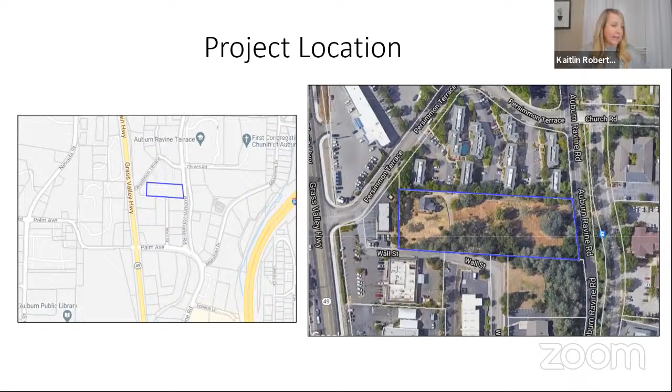On the west side, you'll see that there are three structures proposed. There's these three buildings here, and then this is the existing single family residence to the north. And this is Wall Street to the south. So building one, right here, is proposed to be approximately 1,300 square feet, a single story detached garage. And it will have 4 one-car garages and 1 two-car garage.

And then building 2, right here, is proposed to be approximately 7,000 square feet. This one will be a 3-story structure with a lower level garage and then 2 upper levels of apartment units, 2 one-bedroom apartments on each level. And then building 3, right here, is proposed to be a 2-story structure with 2 two-bedroom apartment units. And that one's 5,300 square feet.

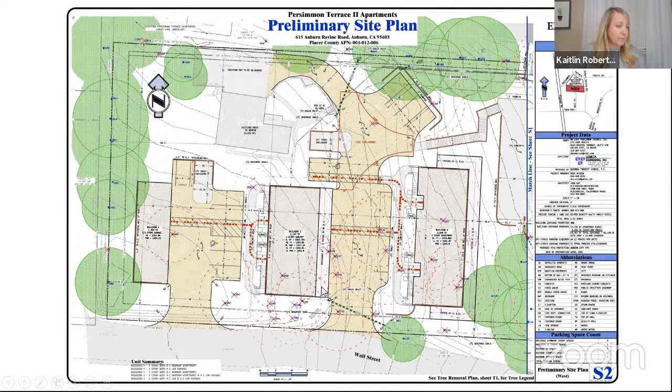In terms of parking, the city requires 2 spaces per residential unit. So for the 12 units that are a part of this project, there would be a requirement for 24 spaces. This project is proposing to provide 31 spaces. Those are included in the garage spaces and then some uncovered surface parking in the parking lots. And then there's also the handicap spaces. I think there's 3 handicap garage spaces and then 3 outdoor surface parking spaces.

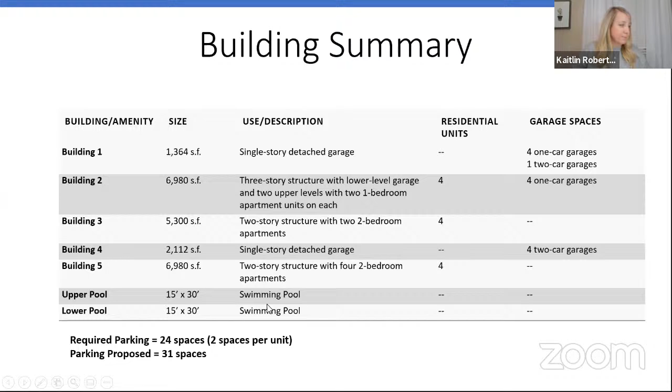There was a preliminary drainage stormwater quality plan prepared for the project, and that report notes that the drainage flows from west through the site, east towards Auburn Ravine. There's an existing inlet storm drain located in the northeast corner of the site, which you can see here, and then this slide provides a better detail. Back here. Drainage, let's see, what was I going to say about that?

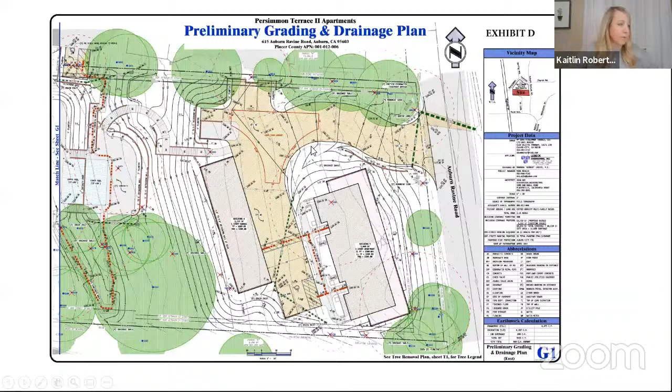This existing storm drain pipes runoff from approximately half of the site through an existing 10-inch storm drain into Auburn Ravine. And then the remaining half of the site drains down Auburn Ravine Road and flows along the westerly side of Auburn Ravine, and ultimately drains through an existing storm drain into Auburn Ravine as well. This existing 10-inch culvert under Auburn Ravine Road will need to be sized up to an 18-inch storm drain as part of the proposed project.

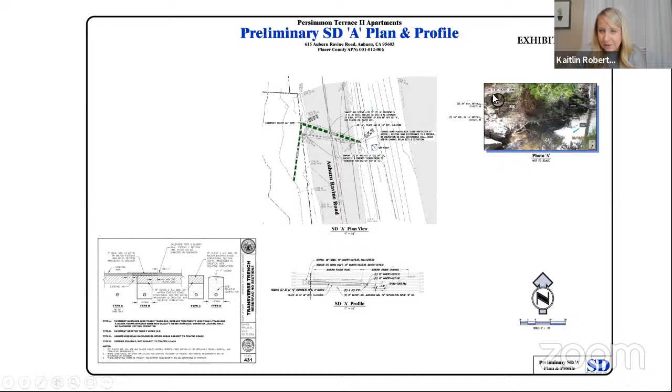In terms of utilities and services, sewer service will be provided by the city. Gravity sewer laterals will connect each of the 3 residential buildings to an existing 10-inch line that's currently serving the property. And then water will be made available by the Placer County Water Agency.

And there's a proposed looped water line on the site, which will be accomplished by extending an 8-inch water connection from the adjacent parcel to the west, and then extending that east to an existing 8-inch line in Auburn Ravine Road. Pacific Gas and Electric will provide gas and electric service to the site.

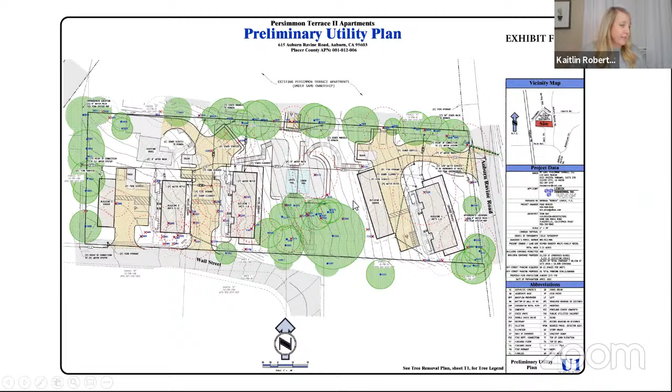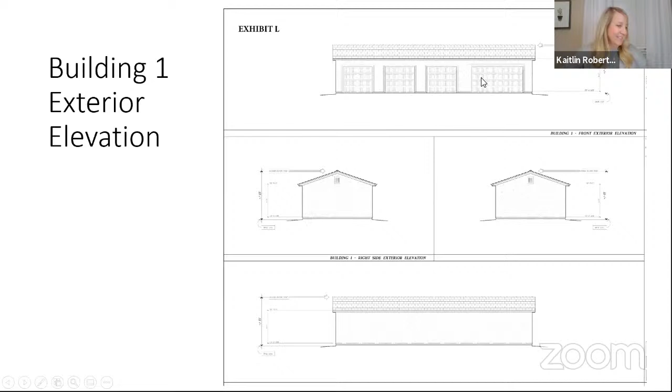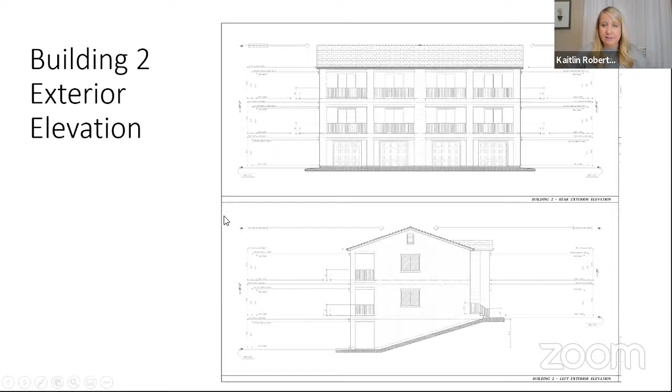And then building 2 here, this is the 3-story structure that will have the lower level garage and then 2 upper levels with 2 1-bedroom apartments on each level. And this is the rear and left elevation. And then the floor plan for the garage level, the lower level, the middle level, which will be 2 apartment units, and then the upper level, which will be an additional 2 units.

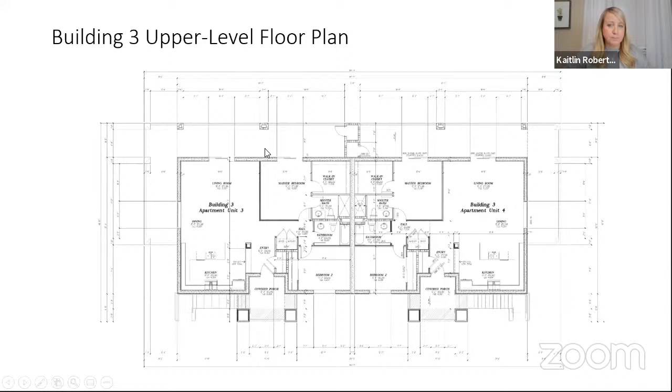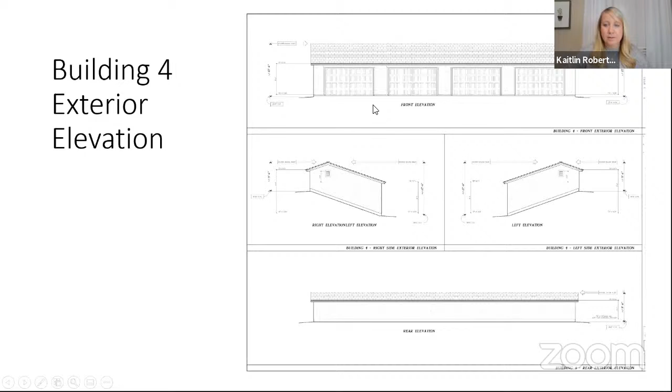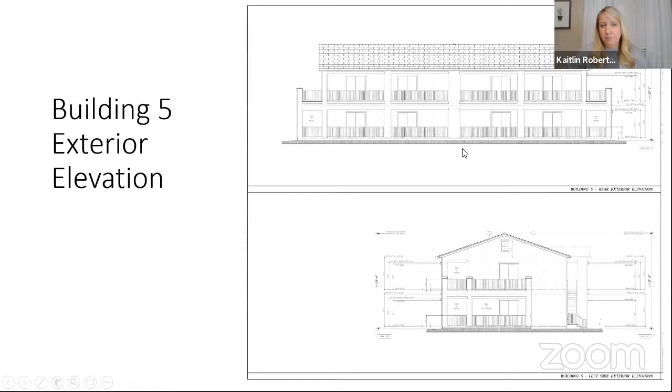And then building 3, this is a 2-story structure with 2 2-bedroom apartments. And then the lower level floor plan for that one, a little bit larger units there. And then the upper level. And here's building 4, which is the other single-story detached garage with 4 garage spaces. And then the floor plan. And then building 5 here, this is another 2-story structure with 4 2-bedroom apartments. And then the floor plan.

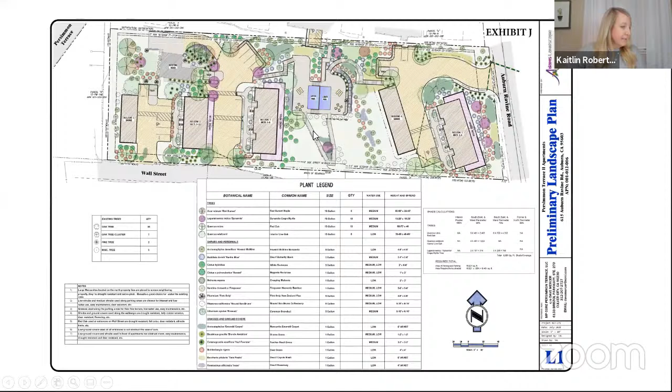Okay. And this slide has the landscape plan that was provided, the preliminary plan provided by the applicant. At the time of building permit or improvement plans, they will be required to submit detailed landscape plans that will be required to comply with city standards. And that's been included as a condition of approval as well.

As I mentioned before, this project is requesting approval of a tree permit. The applicant did provide this tree removal plan and then an arborist report with a mitigation plan. Both of those are included as exhibits in the staff report. There are 99 trees on and immediately adjacent to the site. And of those on-site trees, approximately 54 are protected trees. The project proposes to remove 35 trees for construction, and of the 35, 20 are considered protected trees.

And for the protected trees, the developer will be required to mitigate the removal of those consistent with the requirements of the Auburn Tree Ordinance. Mitigation can come in the form of on-site planting or in the payment of an in-lieu fee. And that is also all included as conditions of approval for the project.

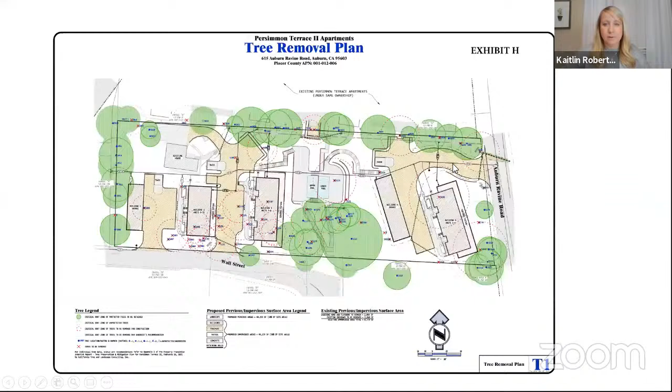Wrong way. Staff has reviewed this project for its consistency with the general plan and finds that it is consistent with the following goals and policies. Land Use Goal 1 is to guide development in a pattern that will minimize land use conflicts between adjacent land uses. Land Use Policy 1.2 is to have multifamily residential projects designed to minimize impacts on adjacent land uses. And then Land Use Goal 3 is to establish a variety of residential densities, which will provide for different housing types and levels of cost.

Okay, staff also reviewed this project for compliance with the California Environmental Quality Act and finds it to be exempt from CEQA per section 15332, which is infill development projects of the CEQA guidelines. And for that exemption, a project is required to be consistent with the applicable general plan designation and all applicable general plan policies, as well as the applicable zoning designation and regulations.

The proposed development must occur within the city limits on a project site of no more than 5 acres and be substantially surrounded by urban uses. And the project site has no value as habitat for endangered, rare, or threatened species. Approval of the project would not result in any significant effects relating to traffic, noise, air quality, or water quality. And then finally, the last requirement is that the site can adequately be served by all required utilities and services.

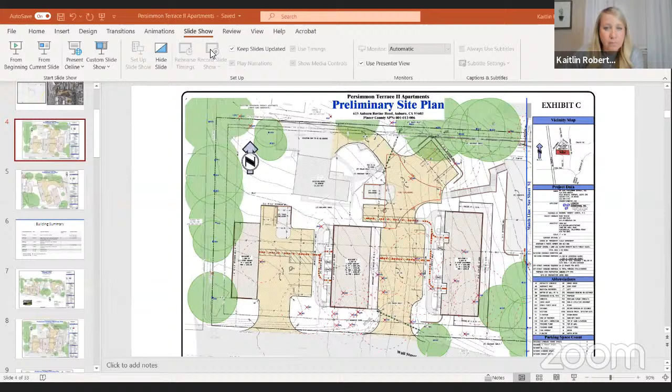Can you put that particular slide back up, Kaitlin? Yeah, I'm just trying to, I gotta get my computer back here. Okay, let me. I'm trying to get the site plan here. Okay, share. Okay, so, oops. The parking for building 3, you're saying?

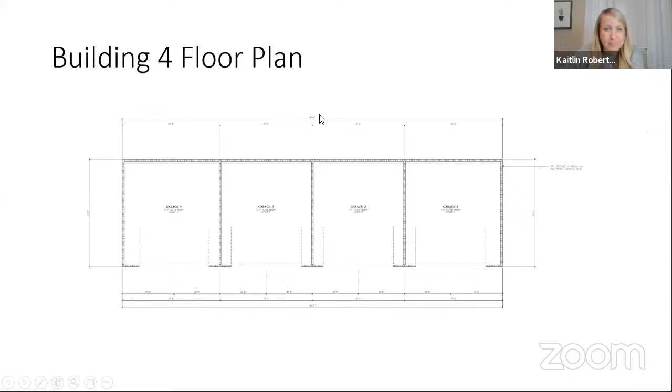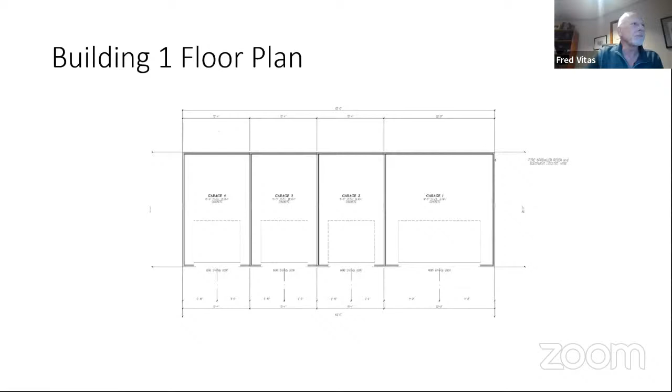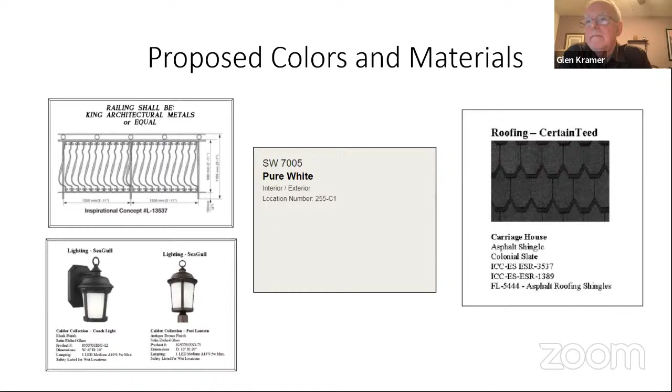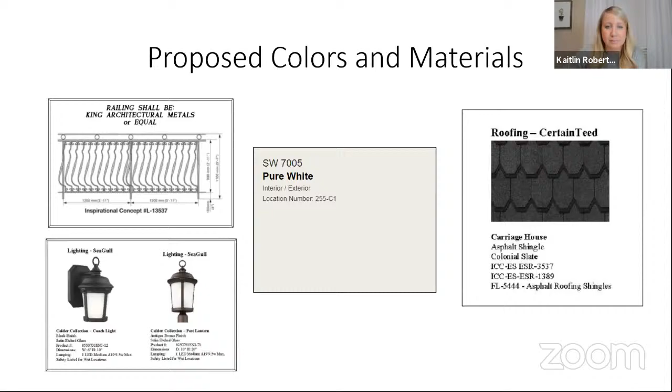Looking for me here. So building 3 is just a 2-story structure with 2-bedroom apartments. Right, but the parking for building 3 resides in the first level of building 2, right? Oh, I see what you're saying. Okay. I thought you were asking if there's parking in building 3. No. I think, well, let's see. Building 3, 1, 2. I guess that's correct. I mean, the applicant maybe can provide, I'm not sure how parking would be assigned on that one. It looks as if there's 2 standard spaces in front here.

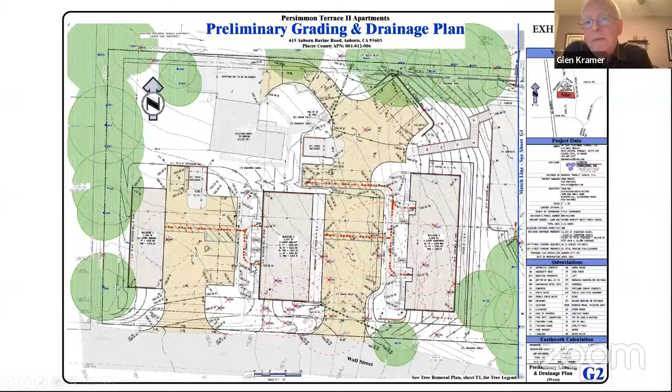And then, yeah, it looks like the parking for building 2 is on building 1. Correct. Yeah, there's the standalone garage. Okay. So what I'm kind of getting at, would there be any kind of noise issues from the garage on a different unit, amplifying up to the residents of the building? I don't know if there was a noise study done, but I'm sure the construction methods and other noise attenuation measures will be implemented to reduce any noise impacts.

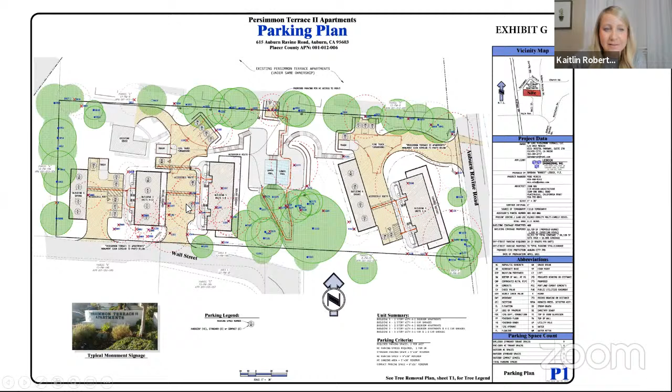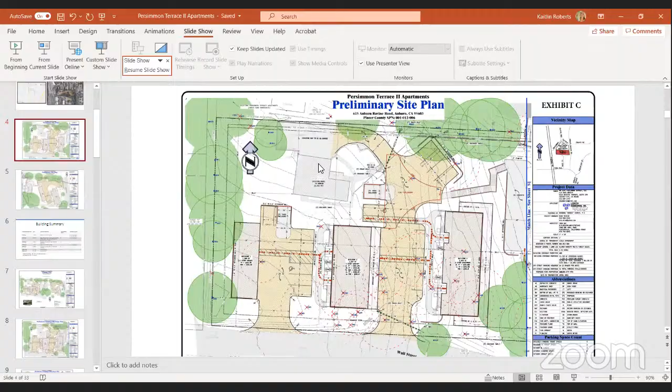Can I chime in here a little bit? This is Dave Mercer. These buildings are being built out of styrofoam blocks filled with concrete. They are extremely low noise. If you've ever been into a building that was built under this construction, you can't hear anything outside.

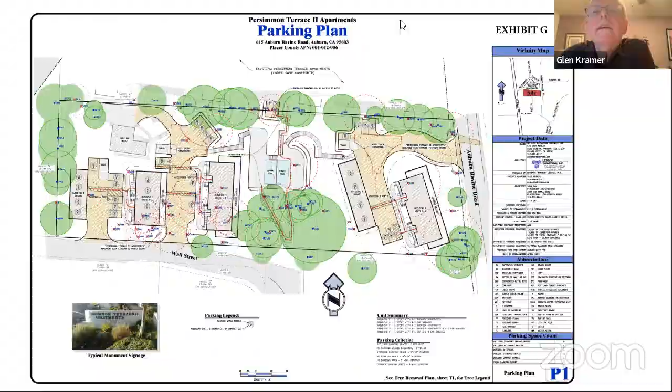Okay, thank you. And then the other question, following up on the lack of the plan showing improvements. Now, on Wall Street, it looks like condition 25 has been modified to allow for no improvements on Wall Street if you run into rock outcroppings for 39 feet. Correct. There's a large boulder towards the end there. And at the time this condition was written, I believe someone was under the impression that there was an existing sidewalk there that could be connected to, but there is no existing sidewalk. And there is a large rock outcropping on that side. Okay, but the remainder of Wall Street will have sidewalk. Correct. Okay, thank you.

Steve Galliard, any questions? None. I have a couple. Fencing, Kaitlin, what will the exterior perimeter fencing be? There is no fencing proposed at this time. If they do propose fencing, it will be on the landscape plans, which will be approved at the improvement plan building permit stage. Okay, very good. Any other questions? At this point, we want to allow the applicant to come forward.

How do I come forward? Hello? You just start talking, Dave. Okay. Introduce yourself. I'm Dave Mercer. We're the owners of the Persimmon apartments that are adjoining this property. Not sure what all else you want. Our company manages about 10,000 apartment units nationwide. And we acquired the Persimmon Terrace along with this land about 4 or 5 years ago. And we've been making a series of improvements on the property ever since. It's a beautiful project on paper. Any questions of the applicant by any of the commissioners? No?

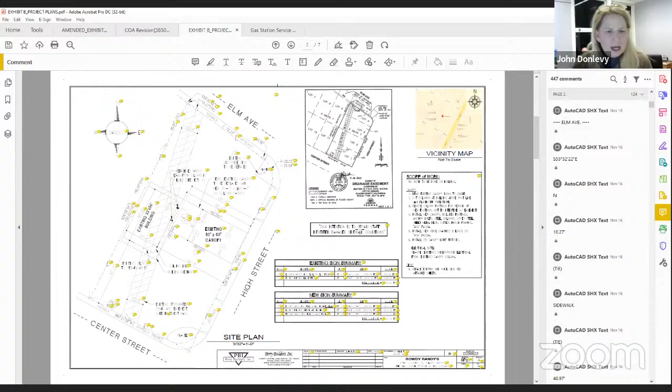So I'm going to see if I can get this plan set so we can take a look at some of the things I mentioned. Okay. So it looks like some comments are popping up on the PDF. So we might want to just ignore those yellow pop-ups, but we can focus on the signs.

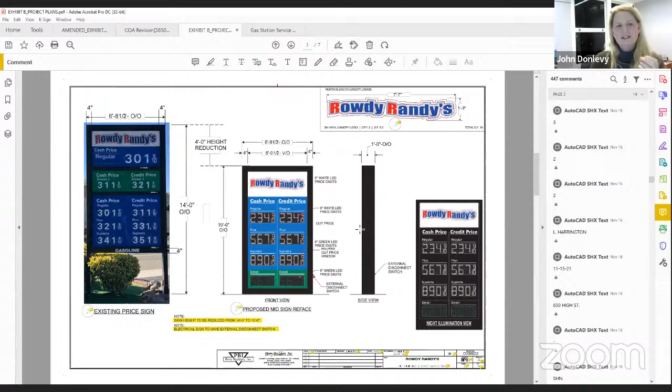And as I mentioned, on the left, there is the daylight view. On the lower right-hand corner, we have the nighttime view where the numbers appear in white and the background fades to a dark color. And you can also see the height reduction, right? So it's more in keeping with the pedestrian and vehicle scale on that corner. It has not been identified as a sight obstruction, but it does keep in mind the scale of the size of the letters and the height that we find around.

Staff had the applicant prepare the photometric plan to identify that there was no spillover onto adjacent properties or into the street. That's also identified in our historic design review guidelines. And then here we have the fascia that's being cladded upon the canopy top. It's made of aluminum, a material that will be in red, white, and blue, and the signage will be digitally printed on top. And I think that pretty much covers it.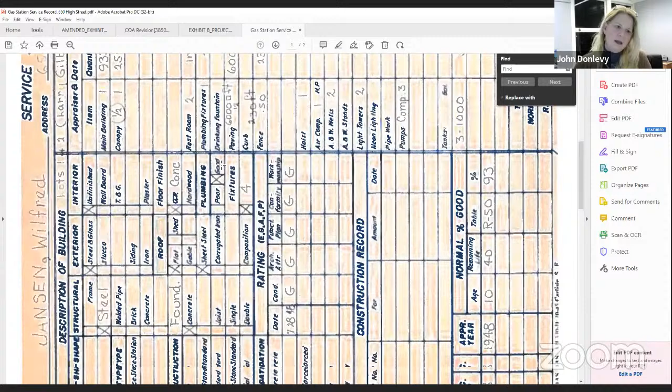I was also able to get some of the earlier comments from the beginning of the agenda, here we go. Regarding the comments on the building's history, staff had inserted the historical background based on city records, more specifically the building records. I wanted to share the information provided. Oh, I don't know if it allows me to rotate this, but city records indicate from the gas station service record that the structure was effective in the year 1938.

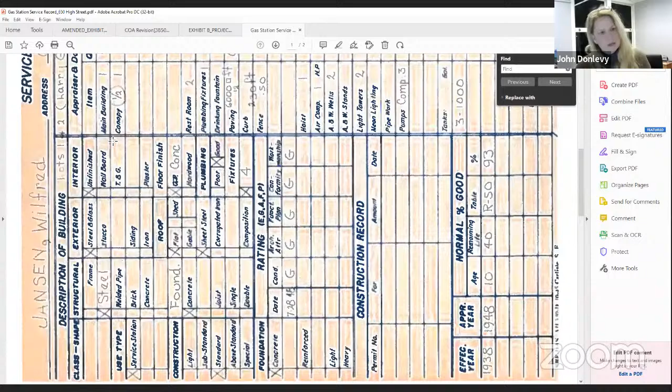It looks like there was a Wilfred Jansen attached to this service record, and there was a lessee known as Larry Gilbert. It doesn't identify the name of the gas station, but when we flip the page, it does show us the footprint of the structure, which includes a lubricating, probably an oil change or service station section, as well as the canopy.

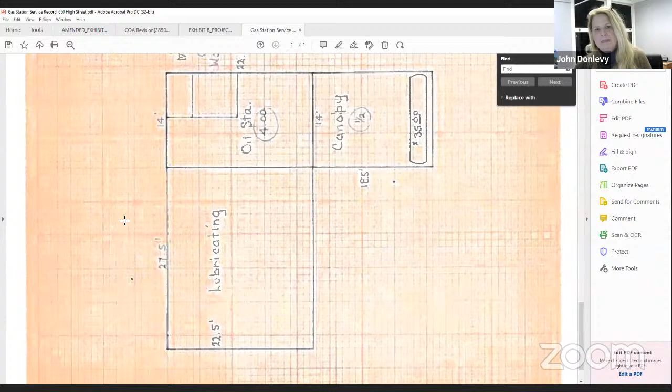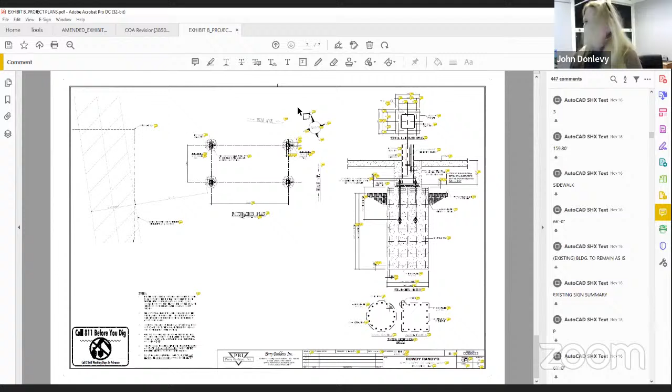So that's just some historical background that staff found as we researched the records and tried to determine past uses and how it's kind of modified and evolved over time. So I just wanted to bring that to the historical design review for comment. But outside of that, I'd be happy to answer any questions that you have at this point. And we'll continue. Thank you.

Commissioners, any questions? Staff? Tanya? Stop sharing. Glenn? Stop. There it is. There it is.

The letter of intent from Perry Builders indicated the height of the price sign was going to be reduced to 12'11", but it looks like staff has further reduced it to 10 feet. Yes, I think there was some ongoing communication with the applicant. That letter of intent is a little bit dated. Since then, the applicant has agreed to comply with the city's regulations, more specifically the historic design review regulations. So that's what you have before you tonight. Thank you. Any other questions?

Commissioner Costa? Just to confirm, the underside of the canopy is going from what was 12'6" up to 15 feet. So that's a 2.5 foot increase in clearance, and you mentioned 3 feet. So I just was trying to understand, the depth of the canopy is 3 feet. I don't know what the depth of the original canopy is, but overall it's raising 2.5 feet for clearance. Is that correct?

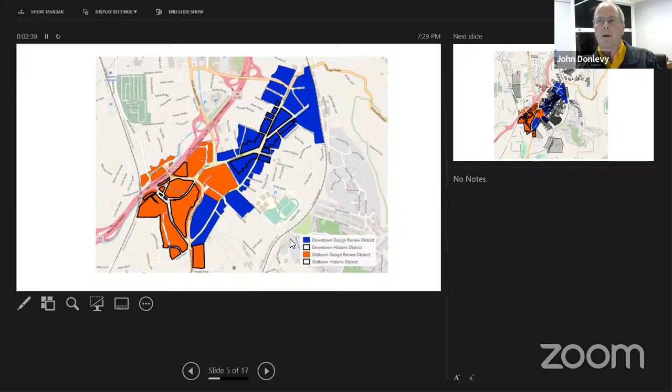So staff has been looking at the districts, the ordinance, how all this applies to properties, and we're generating an overall checklist. There are basically 4 categories of districts. There's the Historic Design Review District, which applies to the HDRC. There are 2 very specific districts, the Downtown Historic District and the Old Town Historic District, and there are 10 historic survey sub-districts. This is the area which comprises your authority as the HDRC. Blue is the HDRC review area for downtown. Orange is the Old Town Design Review District. The outlined areas are the districts. The orange one is Old Town, the blue outlined one is downtown. That's very meaningful.

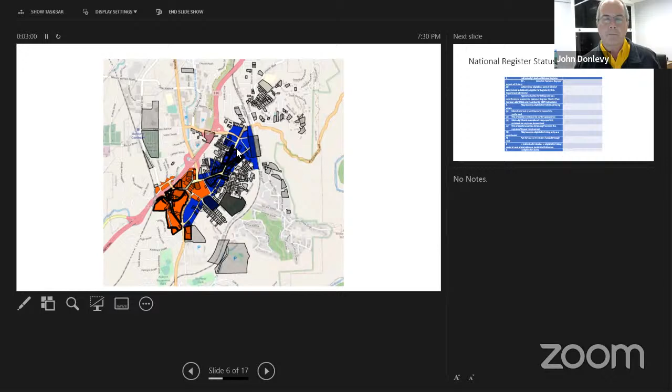We are mapping everything, importing everything into a GIS system. You'll notice there are properties not inside any of the HDRC area. These are properties considered contributing, within the Historic Resources Survey. All of those buildings are given a National Register status code, 1 through 6: 1 being on the National Historic Register, down to 6 being ineligible based on the survey. We've got all the criteria here, and we're going to map that. At the end of this report you're going to get a binder with all of this information, sorted so you know what's what.

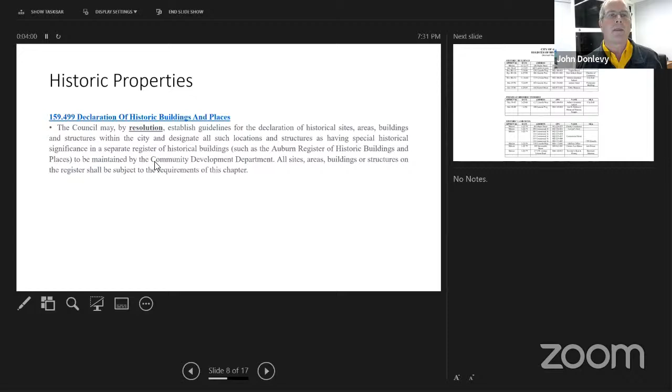So what is a historic building? Technically, it's either A, one of those resolutions, or B, as defined, a historic building shall mean any building within the historic design district. Really important, because there are buildings both in and outside of these districts. So one of the things we're looking at is what these definitions mean, which buildings are actually meant.

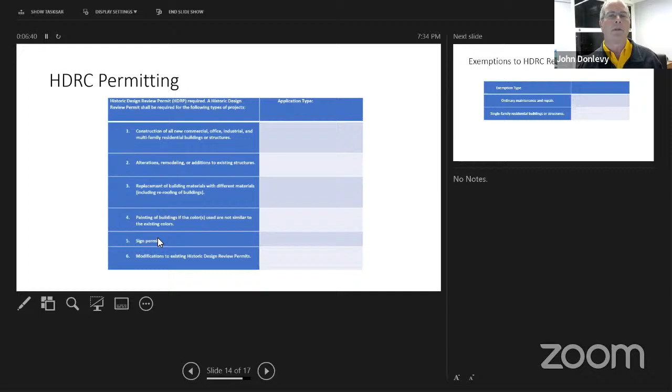When we look at the buildings, some of the things we're looking at are just the factors to consider. One, is it a historic building? Is it in the historic district? Is it in the HDRC district? Is it in a sub-district? Is it contributing, non-contributing, or is it exempt? All these things we're looking at and we're trying to make sense of.

Just to summarize, right now we're doing a lot of data collection. We have literally crushed through every single document that we can find on these things to try and do the second thing. We're going to map everything. And at the end of the mapping, we will have the ability to go in, click on a location, bring up an address. We'll eventually get to the point where you'll get the survey forms, all the information regarding that.

We're doing all of our ordinance and regulatory assembly. And what I mean by that are all the guidance documents. There are design guidelines, there's guidance. There is a lot of referencing to historic preservation office type of things. And we're going to provide that to all of you, and we're going to walk you through all this. Ultimately, we want to have a checklist that will be gone through so that you'll be able to rate and determine things that are going. And at the end of it, we're working towards a process that's very well advertised and well established.